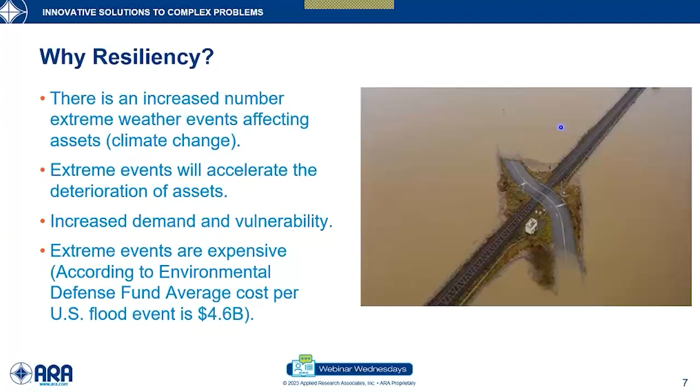One other thing, as you can see, there's the flood, typical flood picture, but I want to debunk that. It's not only about floods. There's also the freeze and thaw cycles and extreme cold weather. Even though there's global warming, these cycles are being more extreme now. So overall, you will have more meltdown, but that would lead sometimes into cycles of deep freeze, more severe, and all of that would affect deterioration of the assets.

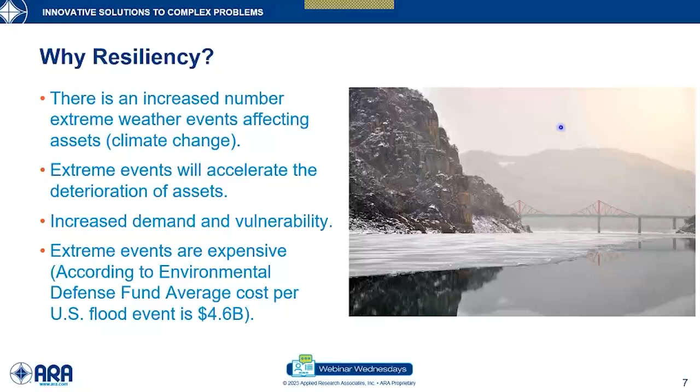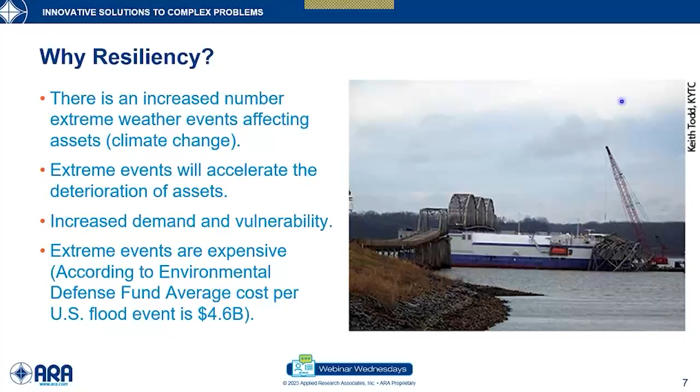One thing before we move on about resiliency, it's not about total failure. As you can see here in the photo, we're talking about the collision that happened previously in a project. I think, Jerry, you were involved in some of these projects. One of the main things when we talk about resiliency is recovery. These assets are not supposed to fail totally, or if they do suffer from some localized failures, they can be fixed. They will stay operational. It's not total failure. That's actually the difference between extreme event designs and resiliency.

Now that we have a good reason to think about resiliency, let's talk a little bit about definitions. There are two definitions that I picked. There are many definitions out there, and they are open to interpretation in some cases. The first one is the simple definition that appeared in different locations.

It's the ability of a transportation system to absorb disruptive events gracefully, so it doesn't fail, and then it restores its pre-disruption level of service. And that word is important. Does it go back to full level of service?

Typically, it doesn't. Now, in the Bipartisan Infrastructure Law, resiliency is defined as the ability to anticipate, prepare for, or adapt to conditions, or withstand, respond to, or recover rapidly from disruptions. This is a long definition, but it's all-inclusive in some sense. And that includes the ability to resist hazards or withstand the impacts of weather events and natural disasters.

So we're talking about both weather events and natural disasters. In my opinion, we should even go beyond that to a general definition of disruptive events. But limiting the discussion to natural hazards and weather events is also good in terms of tying resiliency with sustainability, and there's always that tying there. Or to reduce the magnitude or duration of impacts of a disruptive weather event or natural disaster on a project.

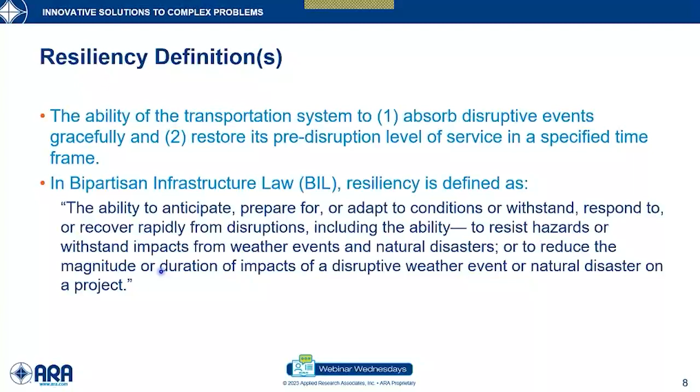One thing to highlight here, it's talking about a single project. So there are different definitions, as I mentioned, and you can find them all over the place. But the main point I want to drive out of this is, first of all, it's not total failure. Secondly, it's open to interpretations. And there are different ways to think about resiliency at this stage.

So let's talk more about quantitative concepts. This is not the full equations, and I'm not going to dive much deeper into all the equations and analytical tools that can be developed in there. But let's put things into a frame of quantitative response.

So the plot here to the left shows you the performance on the y-axis. When we talk about performance, it could be, for example, the capacity to move or transport traffic, the capacity to withstand loads. So there are different measures of performance, and that is important to keep in mind. But we will plot performance versus time. As that asset lives in there, typically this is the normal assumption with geotechnical engineering, even though we all know it's not always true that things will just keep going at the same pace.

However, internally we know that there is some cumulative damage, but let's talk about the simple case. There will be some fluctuation in your performance, it doesn't matter, and then all of a sudden you face a disruptive event that will start deteriorating the performance for a while until you reach the lowest performance level possible at T1, and then it recovers. As you can see, I left a gap in there because typically these assets do not fully recover always. Sometimes they do, sometimes they don't. Now, the main distinguisher, whether they go back to full recovery or not, is your performance measure.

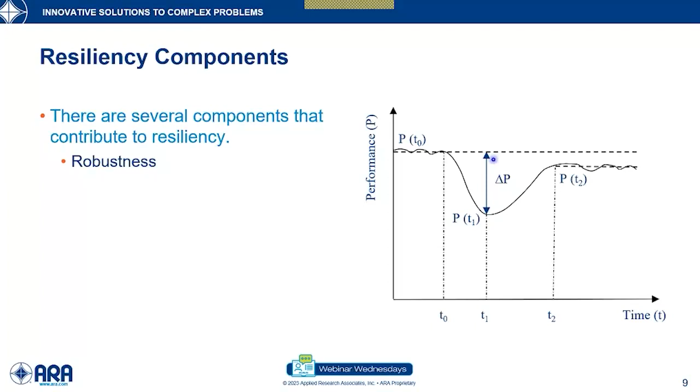Now, some of the components that go into the definition of resiliency is robustness. Robustness is the capacity to absorb a certain level of disruption and stay above some level of performance.

Time to recovery relates to the rapidity of the system - how much does it take you to go back to normal conditions? That's a function of multiple aspects, including plans and so on.

Resourcefulness - do you have the resources to recover? And redundancy of your system. That plays a major role when we talk about network level assessment.

It is important that we talk about these individual components. Now, we eventually would like to have a simpler number that we can summarize with, and that's a very plausible approach - we want a single number. However, we shouldn't totally cover the components and just ignore them over time as we do the analysis.

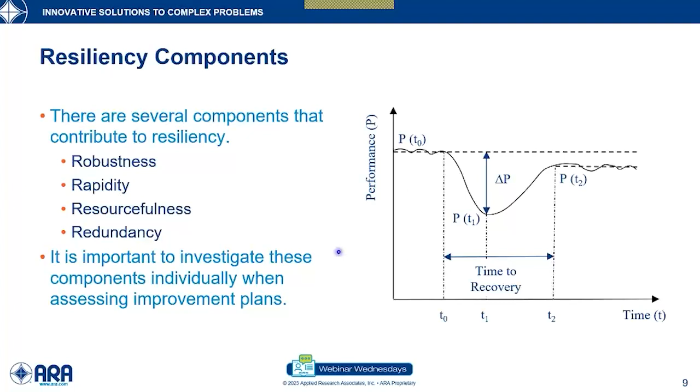So let's talk now a little bit more about geotechnical projects. Where does resiliency assessment, design, or the word resiliency come in? It starts with site investigation - knowing more about your site, what is in there, the challenges you have, the data you have, and the material properties should be assessed in a sense that feeds into resiliency.

Resilience-based design, again, it's not only extreme event design the traditional way - this is targeting recovery over time. And there are some geotechnical asset management aspects when we talk about resilience assessment of in-service assets, your maintenance practices to improve resiliency, and planning and project selection overall.

So, Jerry, you've been involved in multiple projects - where do you think you've seen resiliency being really taken into consideration? I think it's spoken about more frequently on a daily basis than it had been. And like many of these topics, it takes a while to get a foothold and to demonstrate, first of all, how to do it, and second of all, what's the return on investment and how to apply it.

So I think the key message in this slide, number 10, is it's pervasive through the entire process of the life of a feature, whether it's a geotechnical feature or some form of a physical infrastructure feature.

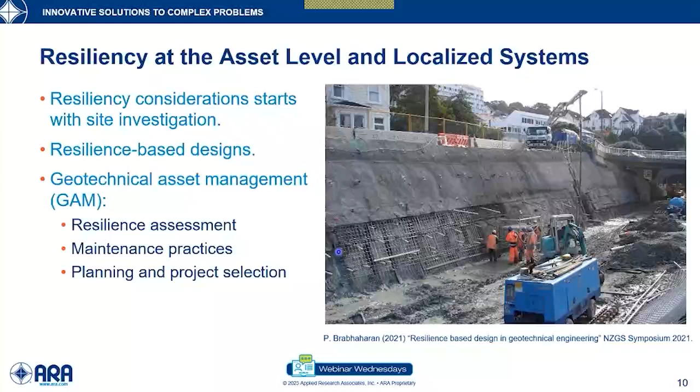That's interesting. And I think one thing also is it shouldn't be a great burden. Once we can show the return on investment, it shouldn't be a burden on the agency or the designer to perform such analysis or procedures, because eventually it would save costs down the road, but that should be done in a smart way, because you may end up spending too much money on planning for resilience.

And a network - awesome. So now also that goes into the network level assessment. At the network level, we're more focused on keeping the network fully functional, so we're not talking about the individual assets necessarily.

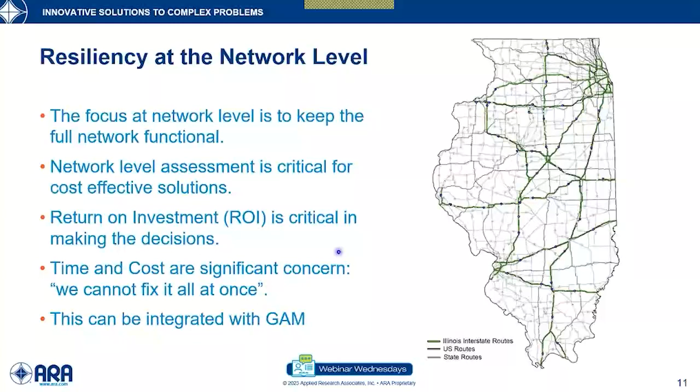Also, network level assessment is critical for cost-effective solutions. When we have long-term or long-range plans, we better account for resiliency, and that plays into asset management, transportation asset management, and geotechnical asset management, one of my favorite topics that I typically talk about.

So for that aspect of it, how should an owner or a designer representing an owner go about assessing resiliency? Do we start at the network level and move down to the asset level, or do we do that in reverse?

That's a very important aspect. Now, based on what I have seen and what we have developed recently, and we both actually worked on this, I would say the answer would be somewhere in between. There's no clear line saying that you should target network level all the way or asset level all the way - it should be somewhere in between.

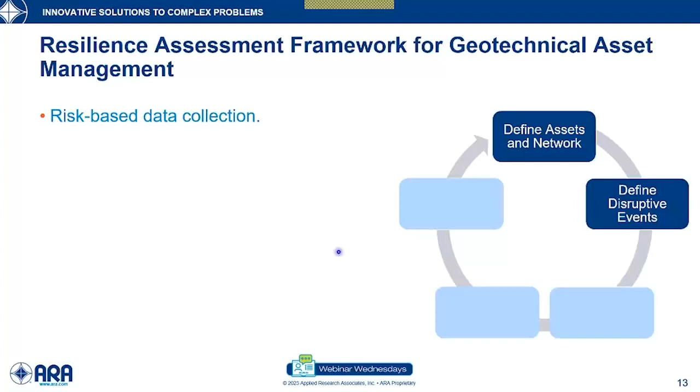So here's a general framework for resilience assessment that we have recently developed together - Jerry and myself, we worked on it. It starts by defining the assets of a network, which takes us into risk-based data collection, and then defining disruptive events, which requires some kind of risk and vulnerability assessment for the assets that you have.

Then we talk about analysis of asset system response, and that's, I think, one of the crucial parts nowadays. People are more aware of the previous two, but this one is a little bit tricky. Quantifying resiliency, again, resilience measures and measurements, there are different definitions, so selecting only a couple measurements is sometimes challenging. And then eventually, improvement strategies.

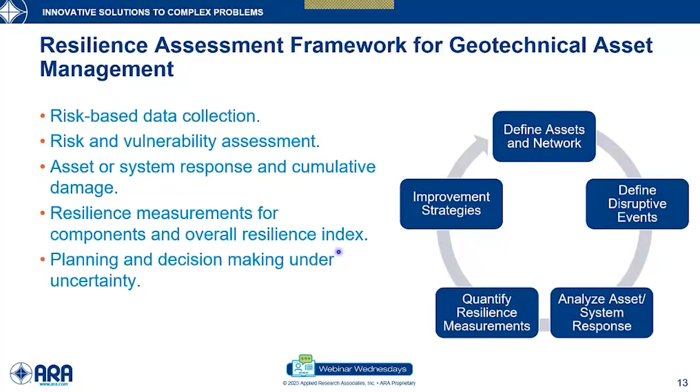So this is not only an assessment of giving a number, but also includes the planning and decision-making under uncertainty for future improvements. And since we're talking a lot about uncertainty, I think I should touch base on risk assessment and risk management for just a couple seconds here. This is a crash course in two minutes.

So what is risk? Risk is the effect of uncertainty on objectives. This is a short definition. There are also many definitions out there, but this one I like because it's short, it's straight to the point. You're not sure about the future, and then you want to see how that would affect your plans or objectives. And the effects could be positive or negative, and we're typically concerned about the negative ones.

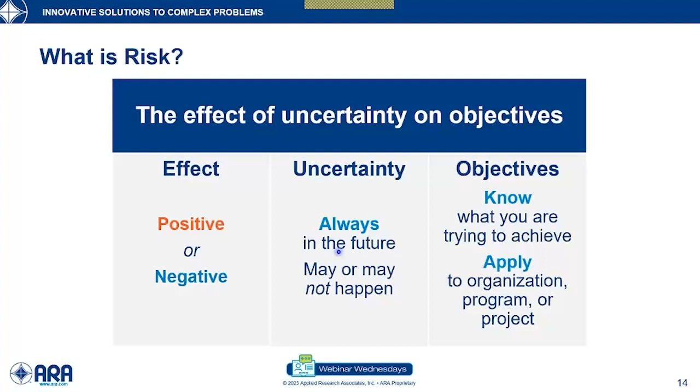Uncertainties, the main thing, they are all in the future. If it happened already, you should know better, unless you don't have enough measurements. But the future, we're talking about uncertainties in the future. And the objectives, this is also important, to know what you want out of this asset. So sometimes your objectives can affect your planning goals as well.

And since we mentioned uncertainty, and this is a major part of resiliency, the definition of uncertainty, surprisingly, it's not as straightforward as everyone would expect. Uncertainty is not only the segments in your distribution. Sometimes you may have some unknown unknowns, that's what they call them. So we have things that we had no clue about, and these typically are referred to as black swan events.

And for some reason, people try to associate risks and risk events to animals. The black swan, the story goes, back in the days in Europe, they haven't seen black swans. Most swans, or all swans, in Europe were white. And then when explorers went outside Europe, they were surprised that there were black swans out there. People were talking about black swans as imaginary animals or creatures, but in reality, they are all over the place outside Europe, in some locations. So that's where the name comes from.

And then there's also the gray rhino, which is basically things that you know about but you overlook. You know that it's coming your way, and you just either didn't have resources to address it or didn't know how to address them. You know that it will happen, but you're not sure how to respond to it.

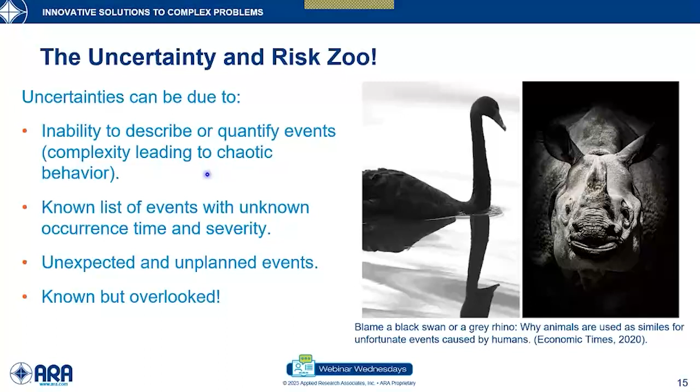Now that we know what risk is about, this is obviously a very, I would say, representation of risk management and risk assessment, but we don't want to spend too much time on it and divert from our topic, risk-based data collection.

What we do with risk-based data collection is try to go out and have a staged procedure. You collect data, for example, at the network level, because you cannot really go and investigate every single geotechnical asset that you have. And currently, many states, if not almost all of them, don't know exactly where all their geotechnical assets are. I know that when I say that several times at conferences, the people from agencies who know that were not surprised at all.

Actually, they are asking for that information, but some other people were surprised. How could that be? They designed them at some stage, but they are sitting on a shelf with limited accessibility to them. You know that there is a wall when you pass by it, but you don't have it in a database that you can go out and revisit to compile data.

So that's what I mean by they don't know where some of these assets are. So you go out, have a general inventory, and then start doing some kind of a staged data collection.

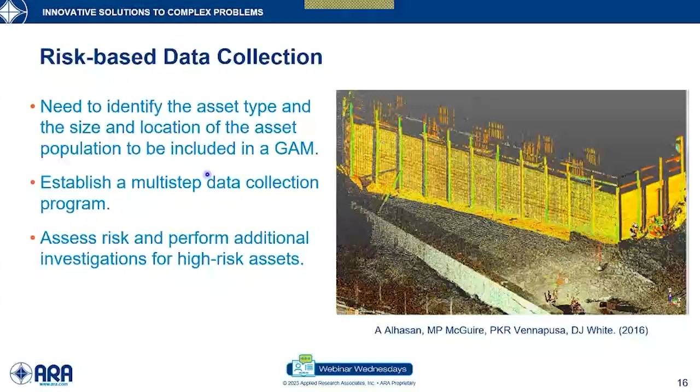So the question with risk-based data collection is: what are the risks associated if we don't go out and measure? According to that response, you can come up with a tiered approach of less extensive data collection, mediocre data collection, and then detailed data collection for assets you need to keep an eye on.

The other aspect, which we talked about, and the loop in the resiliency assessment framework, was the risk and vulnerability assessment. That's important to understand the events that you have. What are the events that you expect? Where do you see them happening? Can you quantify them? Can you quantify their consequences?

And Jerry, let me turn back to you at this stage. You've done a lot of risk assessment and risk management work with geotechnical projects and geotechnical assets. What would you say is the status currently regarding the implementation of risk management? And do people typically do quantitative, qualitative, or a mixture of both?

Well, that could be a webinar by itself, but an elevator answer would be that risk management has been a best practice, to use another buzzword, since the 1970s. In different segments of the infrastructure community it's been embraced. Our good friends at the Corps of Engineers have done this on a regular basis, in part due to the terrible situation caused by Katrina and Rita.

Other segments of the community, in particular the geotechnical community for highways, have maybe not done as good a job as they could in terms of looking at risk from a design and construction point of view. From the aspect of looking at risk and vulnerability from an asset management point of view, the stigma which is slowly being overcome by the geotechnical community is that geotechnical assets don't have a defined life.

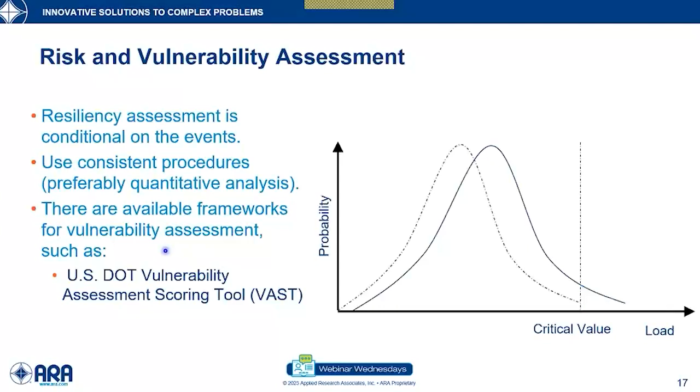But I appreciate your comment regarding the service life of these geotechnical assets, and that would take us into basically the cumulative damage concept.

This is the typical scenario, but it could be applied to other concepts as well. Your water level will start rising. Your culvert should provide enough drainage, but what if the culvert is not in good condition and it's not draining as it's supposed to? Then your water level will start rising up all the way to the top.

Now, if it overtops the pavement and washes it away, that's total failure. So we're not talking about resiliency at that stage - it's just extreme event condition, failure under extreme event.

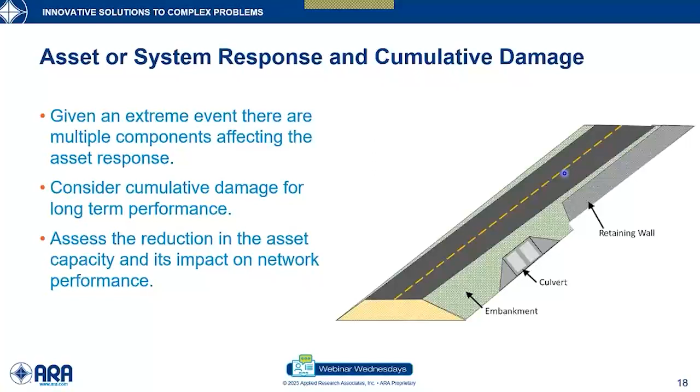Pavements, folks - and I'm half pavements person, half geotech - we typically consider cumulative damage, that's how we design pavements. We assume that cumulative damage and try to model it over time and give you designs to resist that cumulative damage. And with that, let's move on to basically how we quantify resilience.

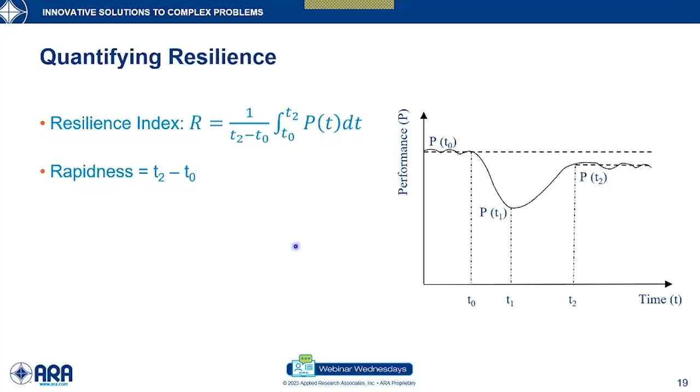It tries to capture basically the opposite of this area under the curve. So the area under this curve is actually a bad thing - the larger this is, the less resilient. So what you're trying to see is what is the opposite of that, and that's why we have the integral of the function, which is basically the area under that curve. Rapidness refers to the time it takes to go back to normal conditions, or the best you can go back to - it doesn't need to be 100%, but the best you can go to.

Now, a more realistic approach is to look at the deterioration, as we talked about - cumulative damage. Geotechnical assets do deteriorate over time, and we all know that, but typically with the designs we don't really account for it. We account for design lives, and these are different than service life. But again, this is a long discussion that would be required for a different webinar by itself.

So what you're trying to do is look at what is the acceptable performance that can be achieved. And that acceptable level - going back to robustness, which we talked about earlier - is how good, or how many times, or what is the time that you maintain it above that acceptable condition. So after a disruptive event, you will have that disruption. That's a reduction in your serviceability at acceptable level, and also you will have that reduction in remaining service life.

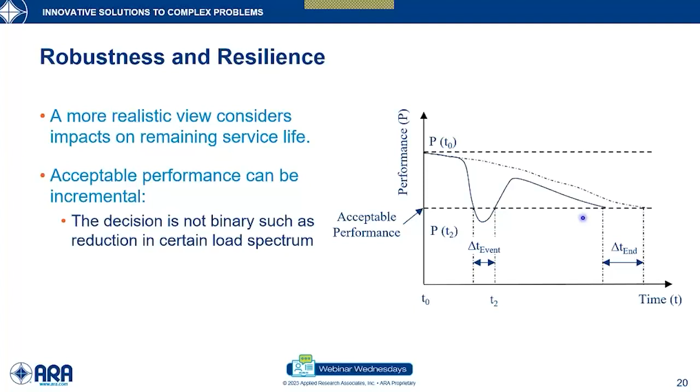So that's in a nutshell, a very quick overview of quantitative resiliency assessment. And that would take us to the improvement plans.

There are different ways to improve robustness and resiliency. You can talk about network level redundancy, maintenance effectiveness - you need that information to really derive your plans - and then also look at some kind of return and risk trade-offs when you do your improvement plans.

Now, mentioning that, Jerry, you've worked with all agencies and all state agencies - what is the typical practice, you think, in terms of improvement plans? Not necessarily resiliency, because I know not everybody is accounting for that, but generally speaking, when we have a collection of assets, I think historically it's been a worst-first examination. I don't think that's necessarily bad. I think where we're headed is more sophisticated examination of improvement plans. And to use another cliche, we've been using a lot of them - the return on investment is quite critical.

We look at some things like structural monitoring that have been around for quite a while - not to suggest that the work that's been done is poor, but the stigma to making it mainstream acceptance is a demonstration of the return on investment and how to model that, the so-called improvement plan connection that you have here.

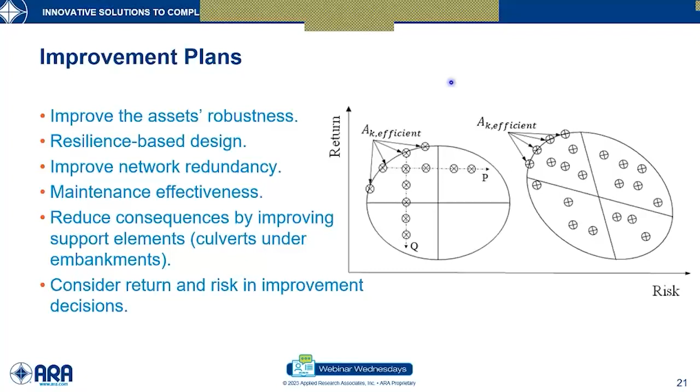Well, I'm glad you reminded me of that. I was diving into resiliency and the fundamentals of that, but let's talk about machine learning now. So let me start with the general definition of machine learning.

Again, this is not the ultimate definition by any stretch, but machine learning is a branch of artificial intelligence, and it aims at observing trends from data and cumulative learning on how to develop a machinery capable of making strong predictions. The main purpose is making good predictions. I use the word machinery because it could be an algorithm and mathematical process—not only about computers, though the application is definitely in computers. Machine learning comes from the fundamental concepts of statistical learning.

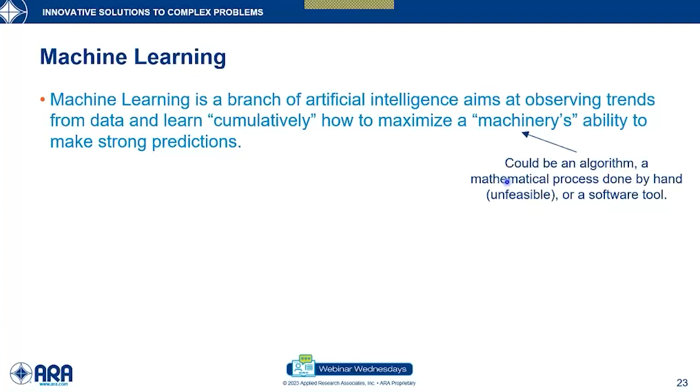So if you have infinite time, you could do it yourself on a piece of paper or a pile of papers—actually run the thing yourself and try to reach answers. So here's a simple, oversimplified explanation probably.

When we do machine learning, you have target responses that you're trying to predict. So you want to know more about soil shear strength parameters or properties. You know there are some potential influencers, such as soil chemistry, geology, soil gradation, location for some reason, and you're not 100% sure why this happens. Some of these we have good models that tie, for example, stress history with some properties of the soil, but we don't have a collective model that looks at all of them, and some we don't even have good models for.

So what you do is compile observations for responses and inputs that you think should affect that. You feed them into your process, and that process doesn't need to know the fundamentals. All it's trying to do is maximize the likelihood—the probability that the model you're trying to fit meets the data you've provided. So the likelihood of that model, you fine-tune the parameters, and there's what's called loss functions, which basically minimize the errors. You try to minimize your loss function, and then you come up with a trained system or machinery that can provide predictions based on history.

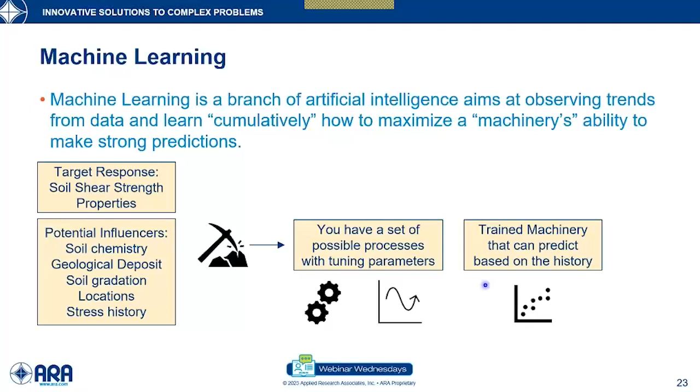So machine learning in general is awesome at finding trends that humans typically cannot find. Your data can be super messy, and machine learning can make sense out of it. But the user should actually know what they want to model.

So for our application in resiliency, machine learning can help develop better performance forecasts of the assets and the network level. Sometimes we don't know—we have a lot of uncertainties when we talk about the future, even though we've observed multiple assets, but we're always surprised how assets change from location to location and under different conditions.

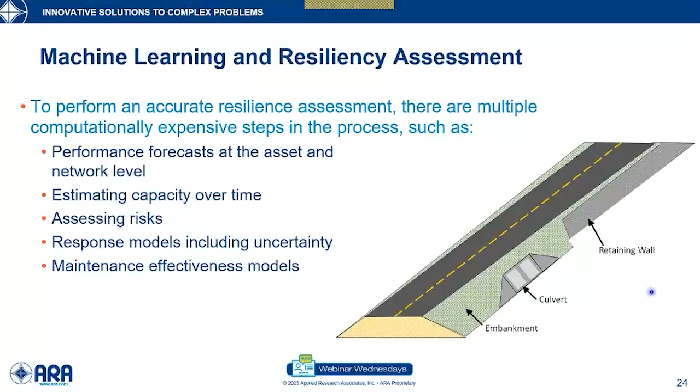You can estimate the capacity over time, how it changes. Again, we talked about cumulative damage—we don't have good models for that. We have some observations, so putting this into a machine learning process can give you insights. Assessing risks is definitely a big thing—risk models are very sophisticated, and having closed forms is not easy, it's a big challenge. And then there's the response we talked about: under a certain disruptive event, how your culvert would behave, how the retaining wall would behave, how the entire system would respond—all that interconnection is really sophisticated to model, so you can start thinking about machine learning. And then maintenance effectiveness models—we have a lot of lost data.

So let's talk now about the trade-offs between physical models and traditional machine learning. Traditional machine learning is what we typically use with statistical learning theory. It has a loss function, and that loss function tries to meet the data and the model in the middle. So that's traditional machine learning.

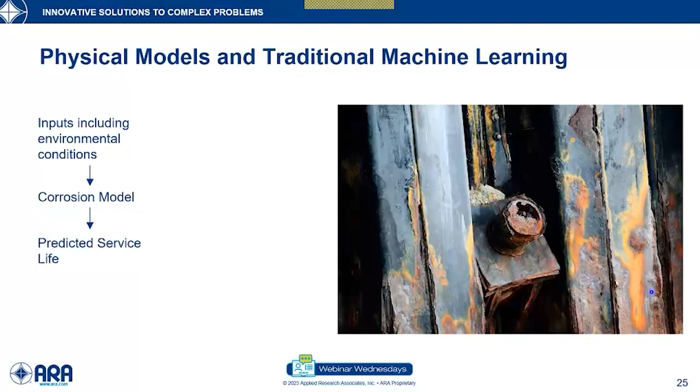The physical models are our typical, for example, corrosion models. We have a corrosion situation with inputs, environmental conditions, and a bunch of nice corrosion models. These are good models. However, they work under controlled environments.

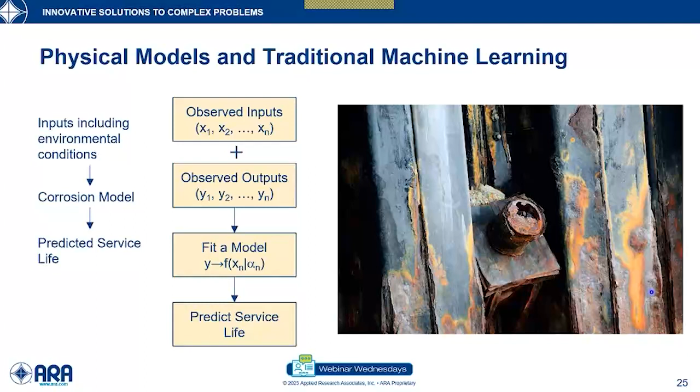So what you do is get a lot of observations, try to fine-tune your model given the outputs you've observed, and then you can predict service life for an asset. However, we know it's messy.

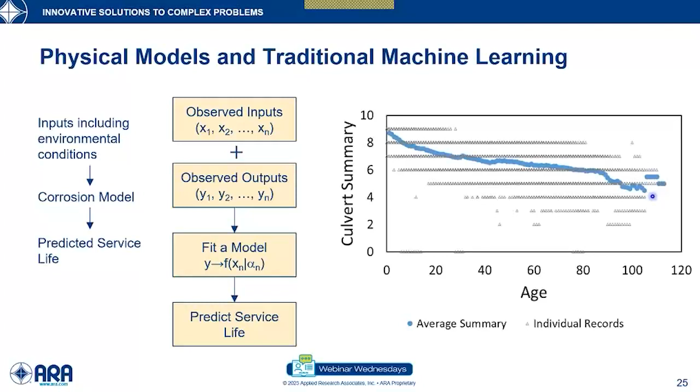So you end up with a lot of uncertainty in your model. The reason for that is you're trying to pile up all the assets under different conditions, different loading and environmental conditions, and call them the same thing.

And that's not true. So what machine learning would do in that case is start accounting for other variables that we cannot really model well. We can eventually develop models at some point, but it's too tedious and there are too many variables we don't want to develop closed-form models for. The interaction between these is sometimes almost impossible to predict.

So feeding this into your machine learning system—again traditional machine learning—you fit observations for parameters, for example concentrations, weather impacts, how close it is to a water body, and all of these aspects. You give it some kind of measurements, it could be some corrosion measurement, and then you fit or train the model by minimizing your loss function.

Your loss function is trying to develop a model, and that could be a sequence of linear models or nonlinear models. That doesn't matter. With traditional machine learning, you're trying to find the best set of models—regardless of whether it's realistic or represents the physical activity. What matters is getting as close as possible to the observed data.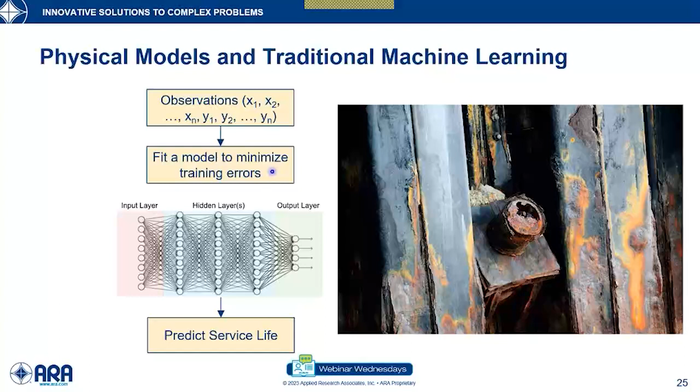So you come up with predictions, but with these traditional models, in many cases you end up with errors when you forecast. Things look amazing, not only good but almost perfect. But then when you predict the future, you realize your assets are not machines and won't always respond the same way. Conditions have changed, or you have accelerated deterioration at some point, and you'll start seeing differences.

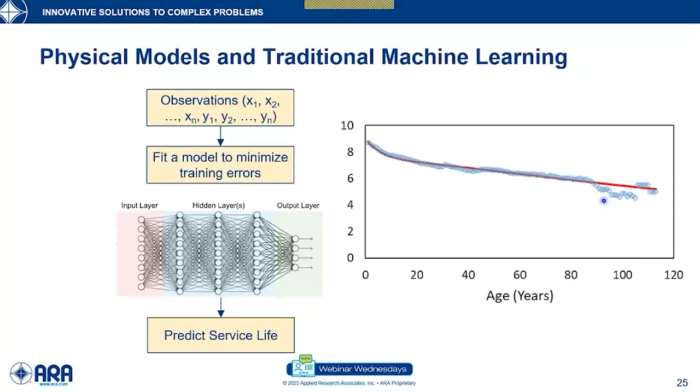That's what led people to think about the limitations of physical models and machine learning. There's a limitation with machine learning: you need a lot of data. If you don't have data covering that future forecast from previous history, you won't do very well. And again, it needs a lot of training and a lot of maintenance.

Physical models, or theory-based models—that's what we call physical-guided or knowledge-guided, theory-guided—they're all basically referring to the same setup of machine learning algorithms. Theory-based only models, the physical models we use to develop, use a very limited amount of data and depend a lot on scientific knowledge, but you don't have enough parameters and variables to model all the conditions out there.

So you end up with bad predictability too—it's all over the place throughout the model. With traditional machine learning, it looks amazing until you go outside the boundary of your training data set. Now, theory-guided data science combines both worlds.

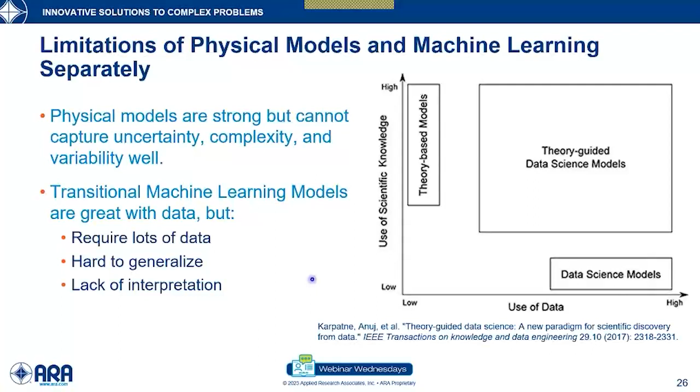So the aim of theory-guided, knowledge-guided, physics-guided machine learning is to combine both and take advantage of each. What we do with knowledge-guided machine learning is use the observations from typical traditional machine learning, and also incorporate your physical models.

You feed some of these inputs to the previous physical models that you need, knowing that they need to meet certain boundaries, for example, based on physics and knowledge, that you cannot go beyond these numbers. This is the boundary of it, the physical fact that nobody can defy. So you model that, but you capture the uncertainty from the observations.

You combine these two, feed them into a machine learning algorithm, but here's the trick: it's not only that you feed them into the algorithm, but you also adjust it to have additional components for a loss function that would capture how far you are from the physical model. So you try to minimize the distance between your predictions and the physical model that, under controlled conditions, should be valid. With that, you come up with an amazing knowledge-guided machine learning process and you provide predictions.

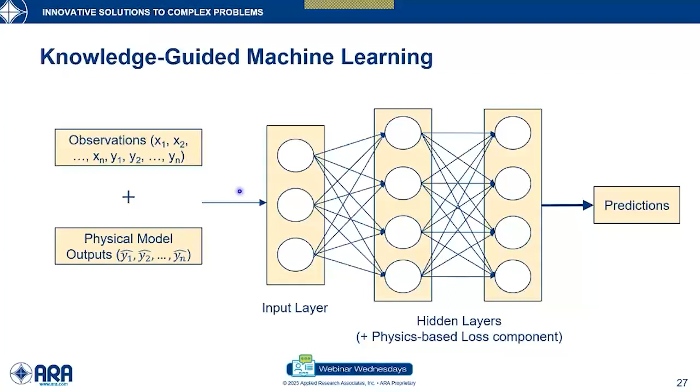Now, what are the advantages and beauties of knowledge-guided machine learning? It needs less data since you can also use your models to guide things. So it's some sort of supervised learning in some sense.

It can be designed to improve over time, and that comes especially when we talk about Bayesian networks and all of that. It allows for physical interpretation—your models are not black boxes. Traditional machine learning is sometimes referred to as a black box, even though that's not the right terminology in my opinion, because some traditional machine learning allows for physical interpretation, but it's very limited compared to knowledge-guided machine learning.

It can be generalized—you can go beyond your boundaries because you have the fundamentals of that model, and the machine learning aspect is just trying to capture the uncertainty you could not capture with the physical model. It's physically consistent; it would not give you crazy, inconsistent findings.

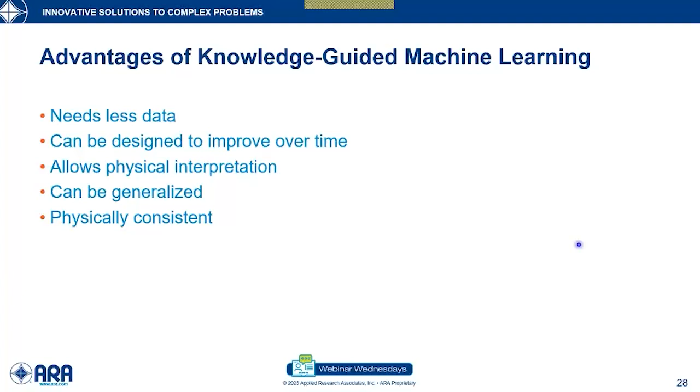In traditional machine learning, your models can flip if your training dataset or your model is overfitting at some point. It can flip on you and give you something inconsistent, totally awkward numbers that don't make sense. So you can avoid that with knowledge-guided machine learning.

I know that was brief. We are working currently on a project to implement some of these ideas. We have some amazing team members here who are knowledgeable about machine learning. Myself, during my PhD, my minor was in statistical learning and its application for profiling and image processing.

Now, looking to the future, where does knowledge-guided machine learning come in? Sharing data from different locations—you will have big data. There is a tendency now to talk about global databases, nationwide databases, where you can also utilize all of that to improve your predictions, because sometimes geotechnical investigations are expensive.

Use it to interpret and improve the interpretation of geotechnical properties, as we talked about, and organize the data. Improve risk analysis—100%, that's important. Capture the uncertainty in these sophisticated models with multiple interactions. And finally, improve the predictions and improvement plans. These are some of the main features, I think, of machine learning.

With that, Jerry, do you have any insights into this aspect?

Well, just quickly here, we talked about the future, and it reflects back on me to the past and the present. In the past, in 1973, when I began my career, we were still in the heyday of the earthworks business in transportation and highways, and we kept using the same techniques over and over again to repair landslides, but we really didn't have the technical manuals. We didn't really have the design processes and procedures that we now have in place, and certainly we didn't have the software tools. So the connection of creating those products really was a crude form of machine learning, if you will, because we took all those individual project knowledge and experience and wrapped them into training courses and manuals.